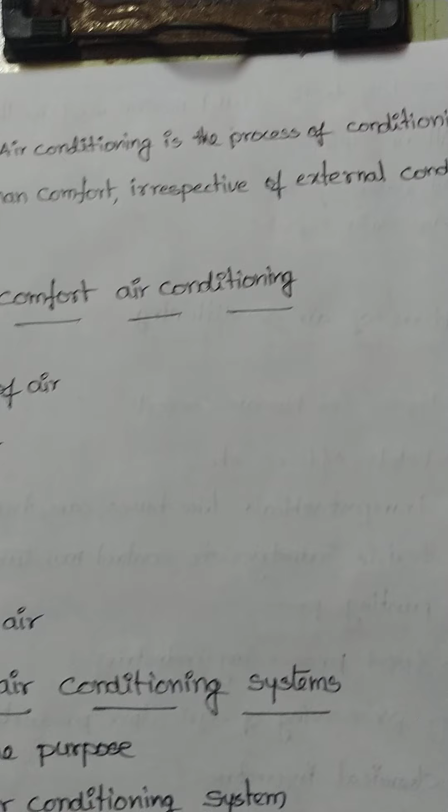Air conditioning is the process of conditioning the air according to human comfort, irrespective of external conditions.

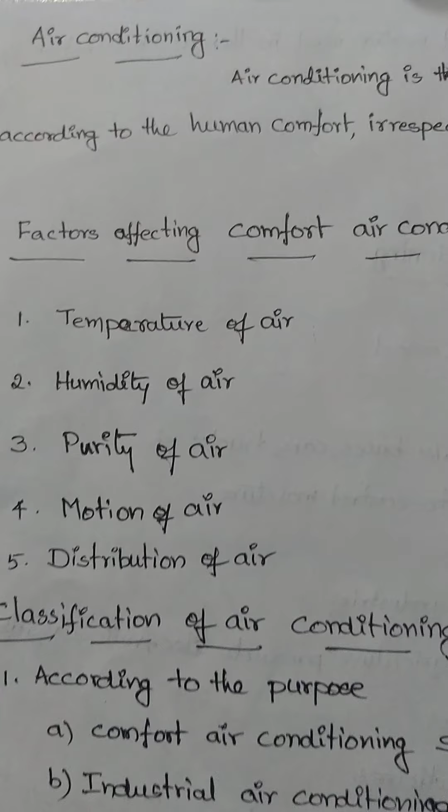So air conditioning means not only cooling or heating, it can maintain the temperature of air, humidity of air, purity of air, motion of air, and finally distribution of air.

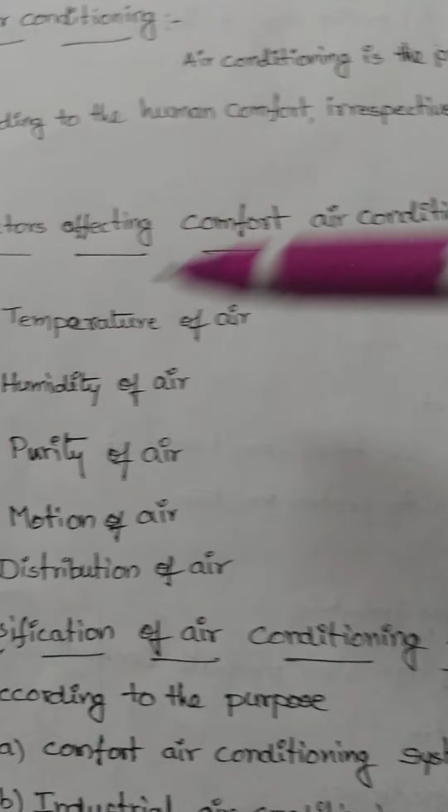These are the factors affecting comfort air conditioning. First one, temperature of air.

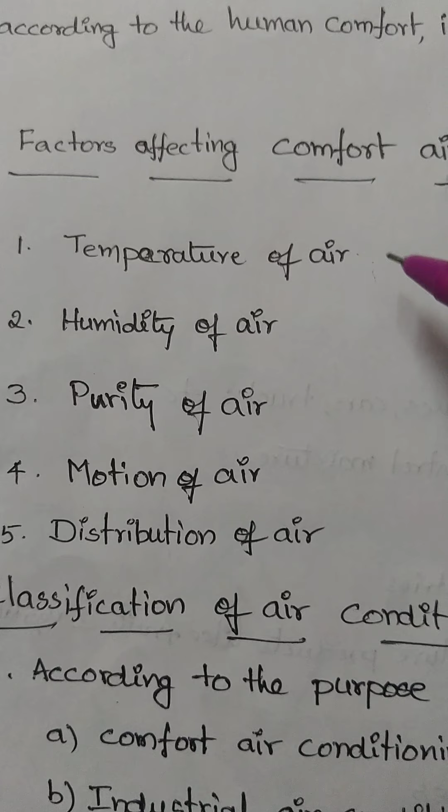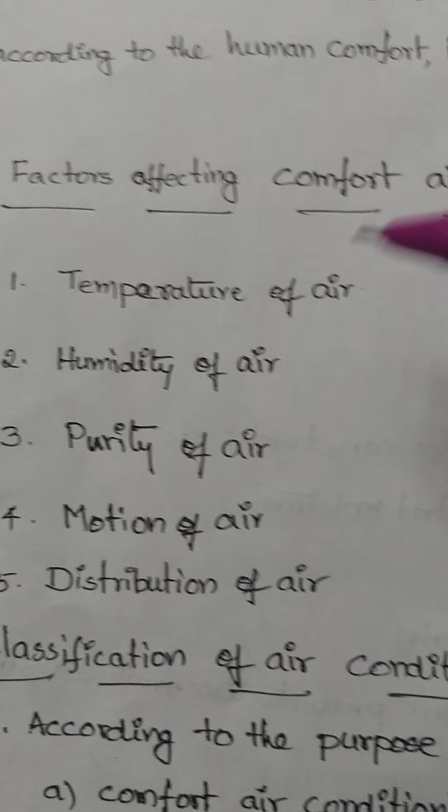Normally, human comfort temperature is around 24 degrees centigrade. But in summers, it should be around 40 degrees, or in winters, it is around 15, 10 degrees like that. So in summer air conditioning, the system cools the air, and in winters, the system heats the air according to human comfort. Next, humidity of air.

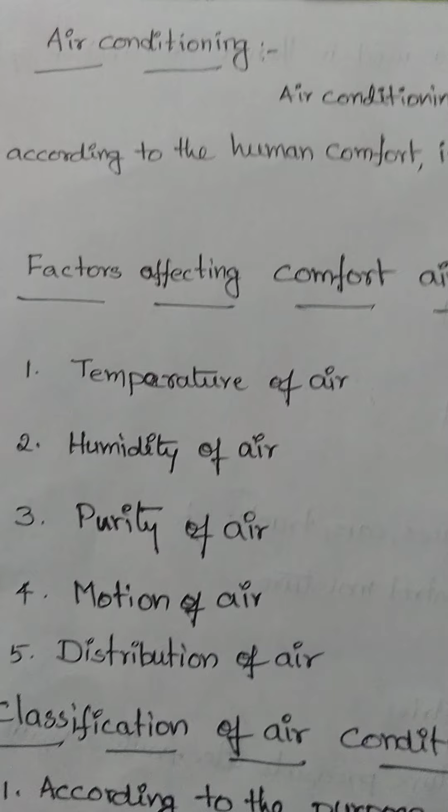Humidity also plays a major role for human comfort. Generally in summers, air has more humidity; in winters, it has less humidity. So human comfort relative humidity is around 50%, and it should be maintained around 50%.

So generally in summer, the system should maintain relative humidity less than 60%, and in winters, relative humidity of air is more than 40%. The system should maintain the humidity of air.

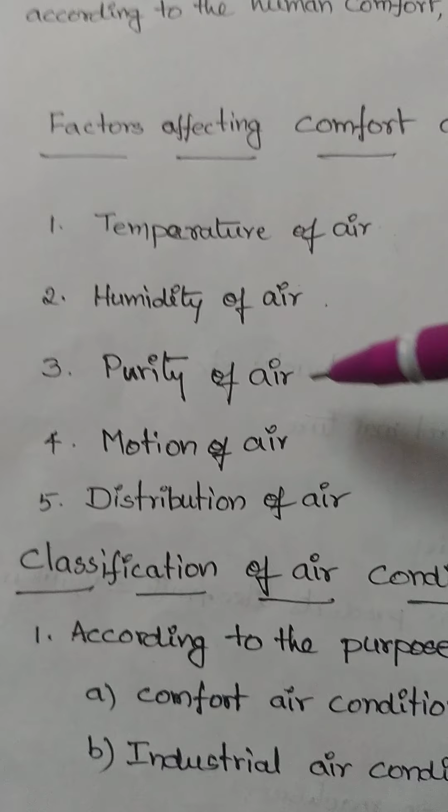Next, purity of air. Purity of air is also an important factor for human comfort. For that purpose, filters are provided in the air conditioning system. Filters purify the air, removing dirt or any impurities, and that purified air is passed to the conditioned space. Next, motion of air.

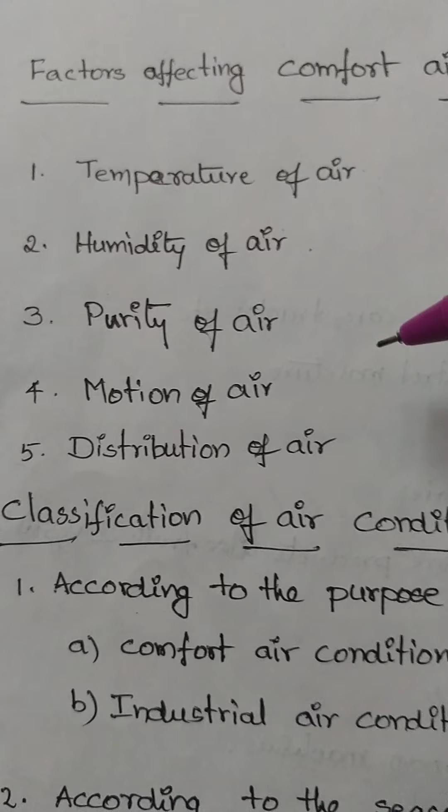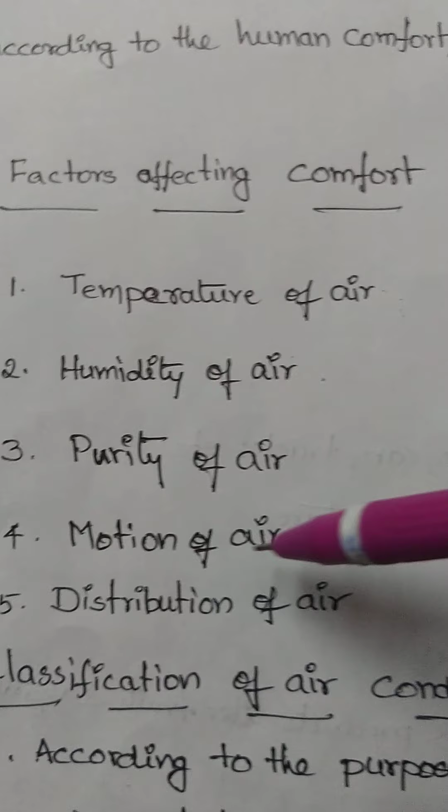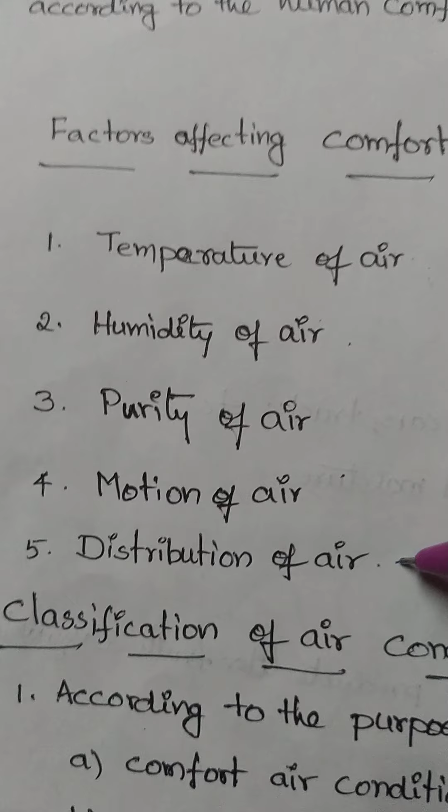Next, distribution of air. The system distributes the air throughout the room, to all corners of the room. So distribution of air is also one of the factors. These are the factors affecting comfort air conditioning: temperature of air, humidity of air, purity of air, motion of air, and finally distribution of air.

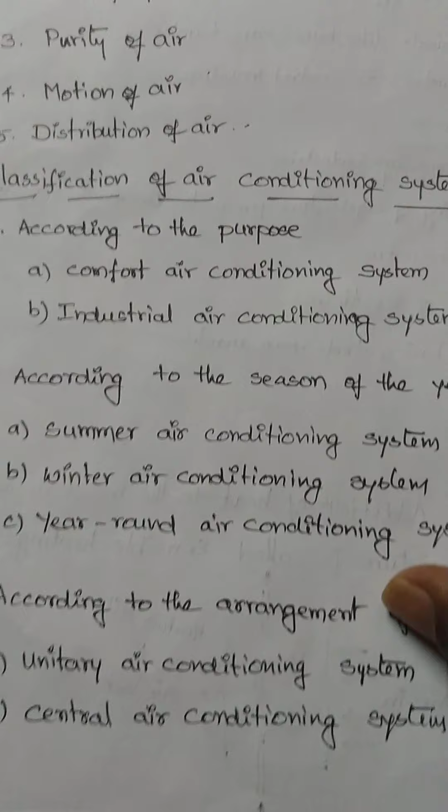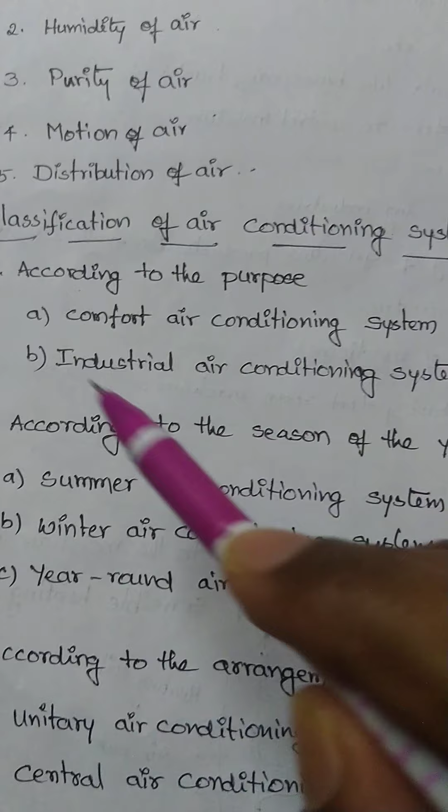Next, classification of air conditioning systems. First, according to the purpose, air conditioning systems are classified into two types: comfort air conditioning system and industrial air conditioning system.

Comfort air conditioning system is for human comfort, and industrial air conditioning systems are for industries that require air conditioning, for example food processing industries, storage of medicines, and dairies. So under purpose: comfort air conditioning system and industrial air conditioning system.

Next, according to the season of the year: summer air conditioning system, winter air conditioning system, and year round air conditioning system.

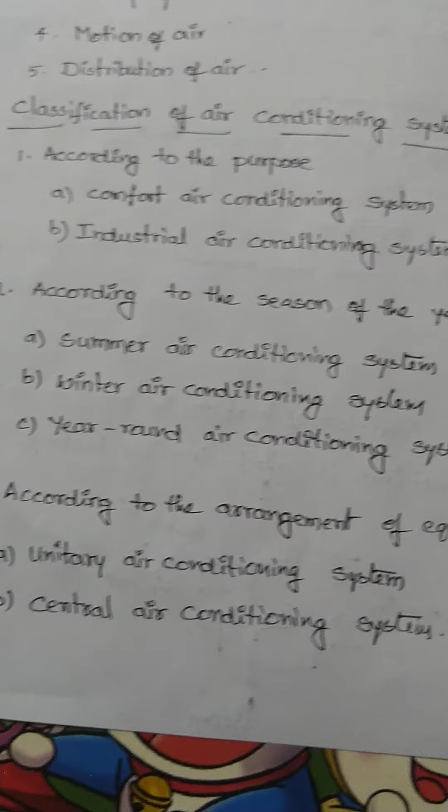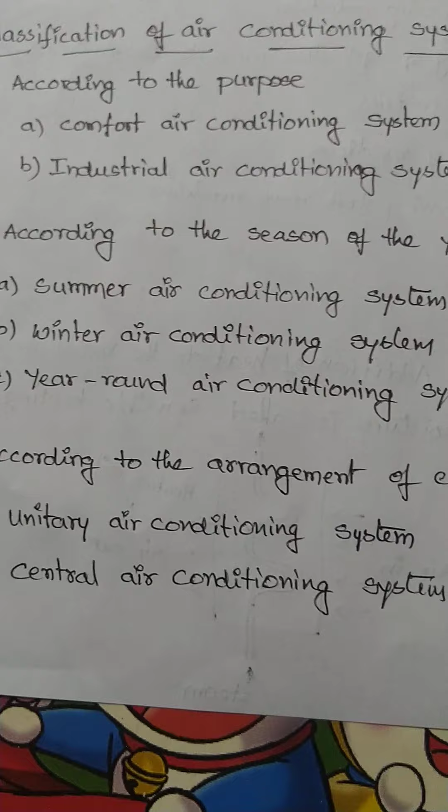Next, according to the arrangement of equipment. First is unitary air conditioning system, for example window air conditioning or split air conditioning. Second is central air conditioning system, generally used in theaters, malls, and some industries.

Finally, according to the fluid media used in the thermal distribution system: all air system, all water system, air water system. These are the classifications of air conditioning systems.

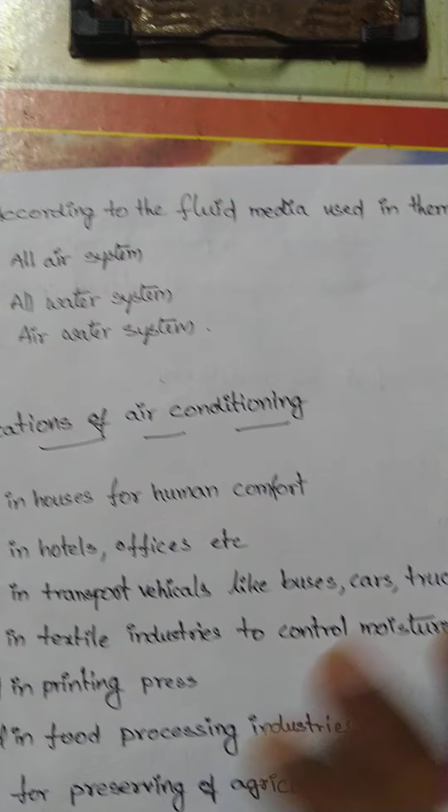According to the purpose: comfort air conditioning system, industrial air conditioning system. According to the season of the year: summer, winter, and year round air conditioning system. According to the arrangement of equipment: unitary and central air conditioning system. According to the fluid media used in thermal distribution system: all air system, all water system, air water system. That is the classification of air conditioning.

Next, applications of air conditioning. Air conditioning is used in houses for human comfort, in hotels and offices for commercial purposes, in transport vehicles like buses, cars and trucks, and in textile industries to control moisture.

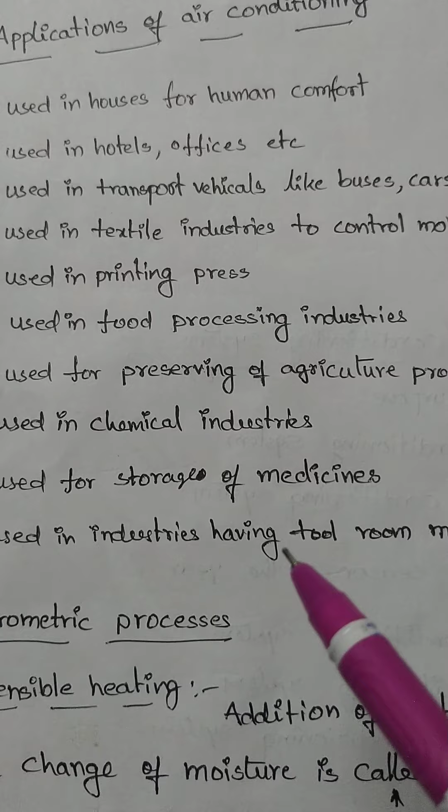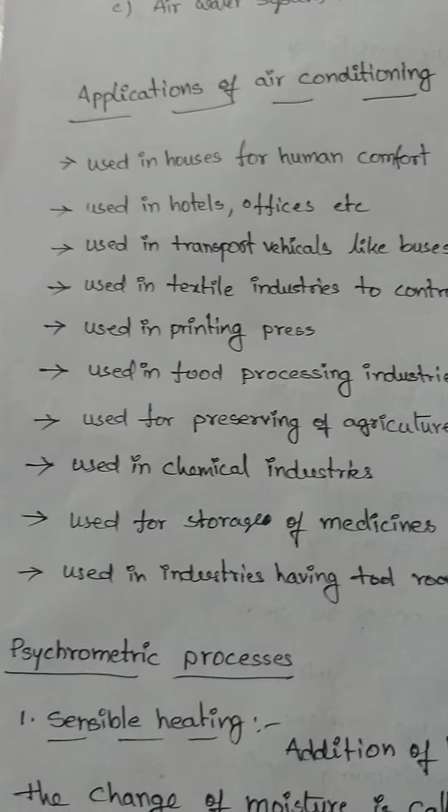Used in textile industries to control moisture, used in printing press, used in food processing industries, used for preserving agriculture products like fruits and vegetables, used in chemical industries, used for storage of medicines, and used in industries having tool room machines. These are the applications of air conditioning system.

Next, psychrometric process. Under psychrometric process, generally: sensible heating, sensible cooling, humidification and dehumidification. These are the processes under psychrometrics.

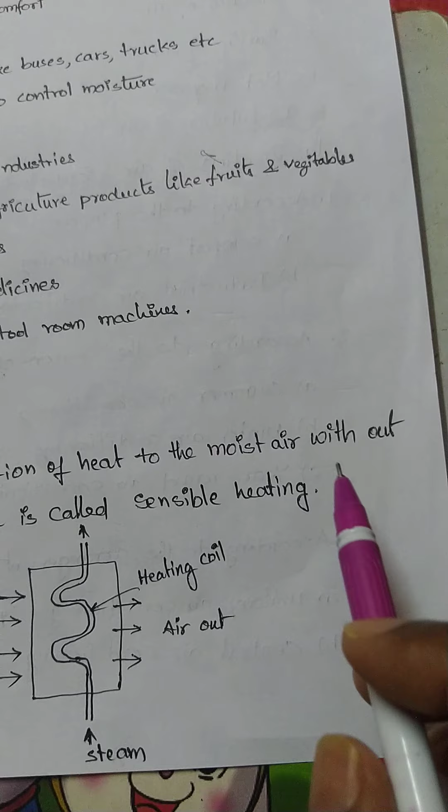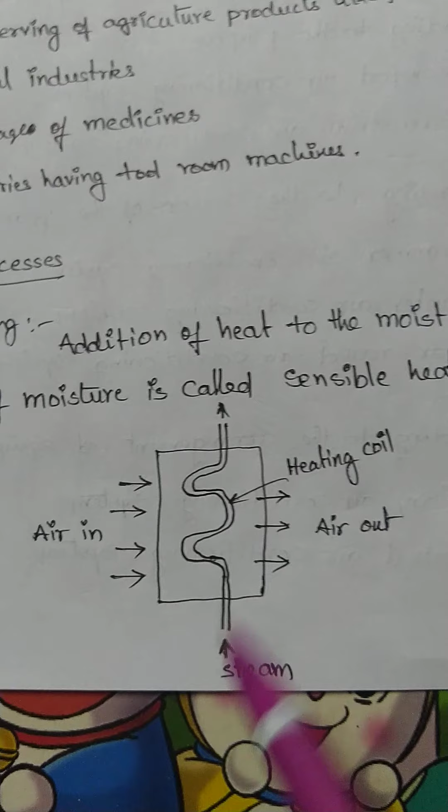First, sensible heating. What is sensible heating? Addition of heat to the moist air without change of moisture is called sensible heating. So only heating is carried out here, with no change in the humidity or moisture content in the air.

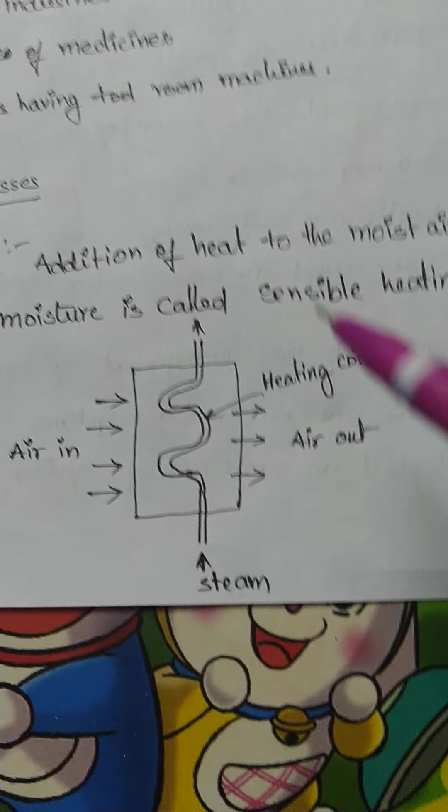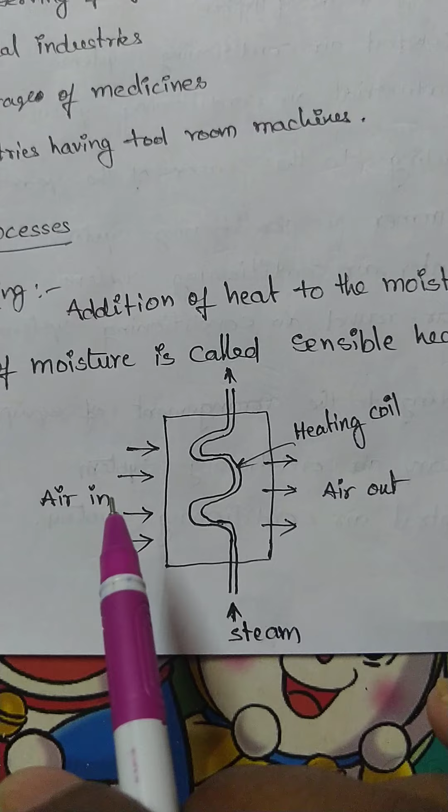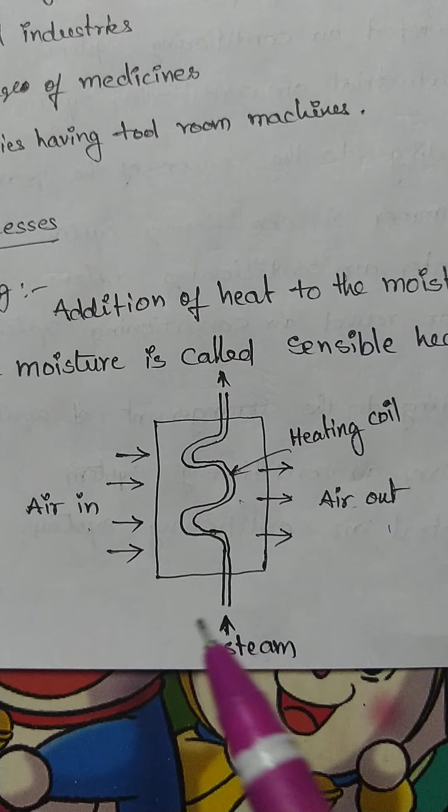This is a heating coil. Steam is passed through the coil. Now the air passes through this coil, so it gets some heat from it. Here heat transfer takes place, so that air is heated. At the leaving of this system, air is heated. So heating takes place without changing the moisture content in the air — that is sensible heating.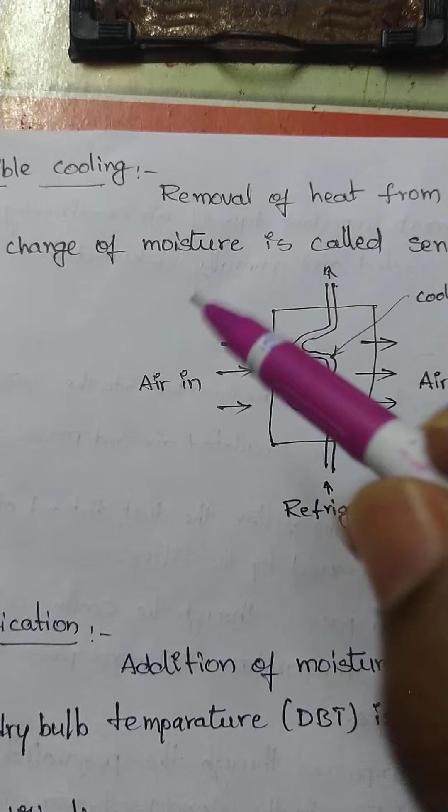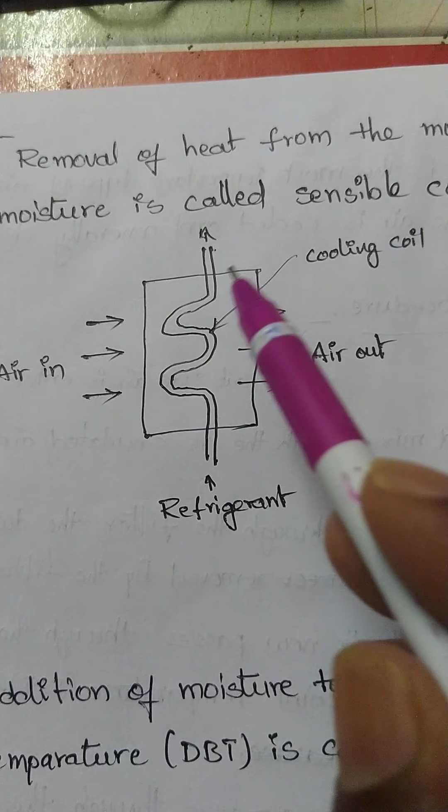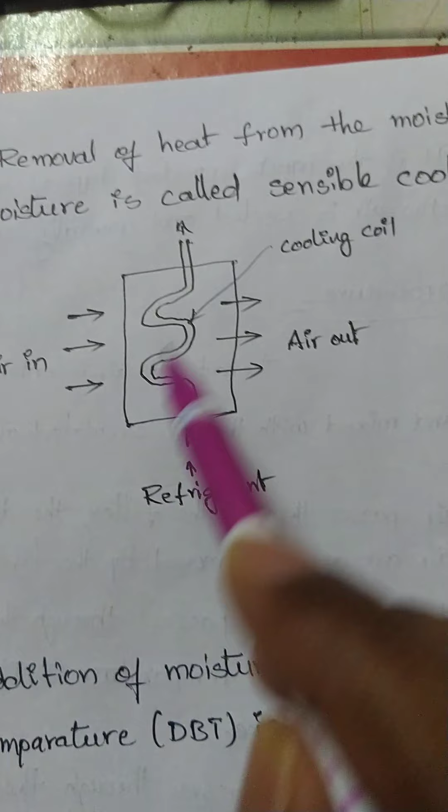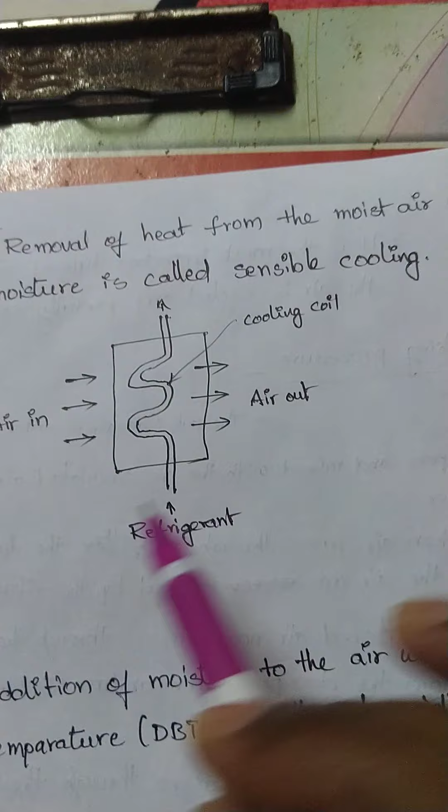Next process is sensible cooling. Sensible cooling means removal of heat from the moist air without change of moisture content. So in this system there is a cooling coil, and air passes through it from this side to that side. Heat transfer takes place, so air is cooled, but moisture remains constant. That means we cool the air without changing the moisture content. This is sensible cooling.

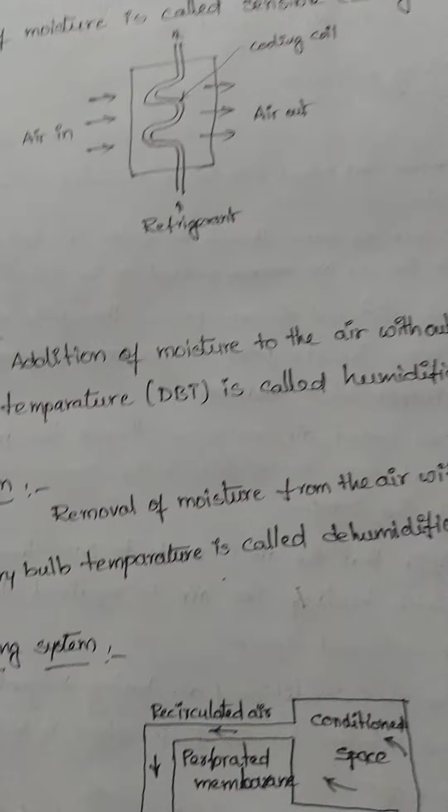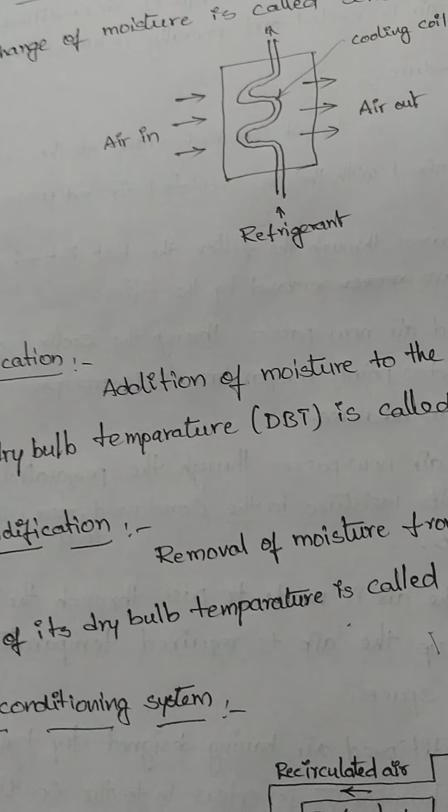Next, humidification. What is humidification? Addition of moisture to the air without change of its dry bulb temperature is called humidification. So moisture is added to the air but dry bulb temperature is constant.

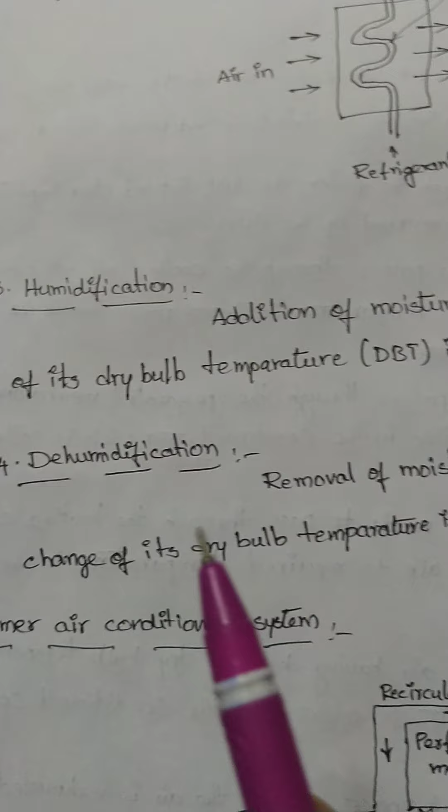Next, dehumidification. Dehumidification means removal of moisture from the air without change of its dry bulb temperature. That means moisture is removed from the air but dry bulb temperature is constant. So these are some of the processes in psychrometric process.

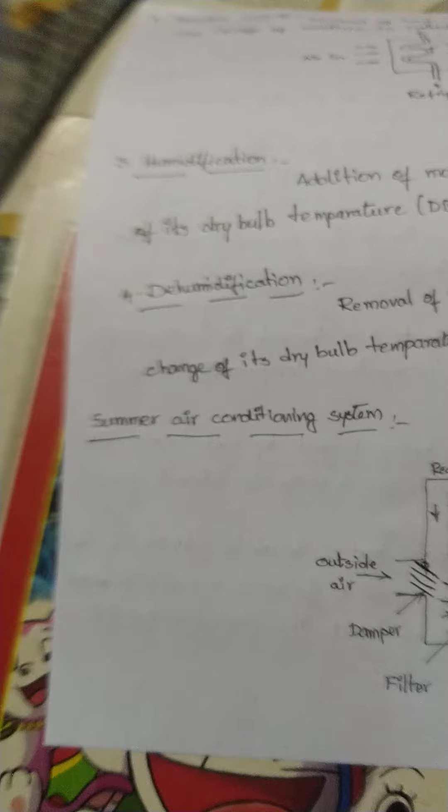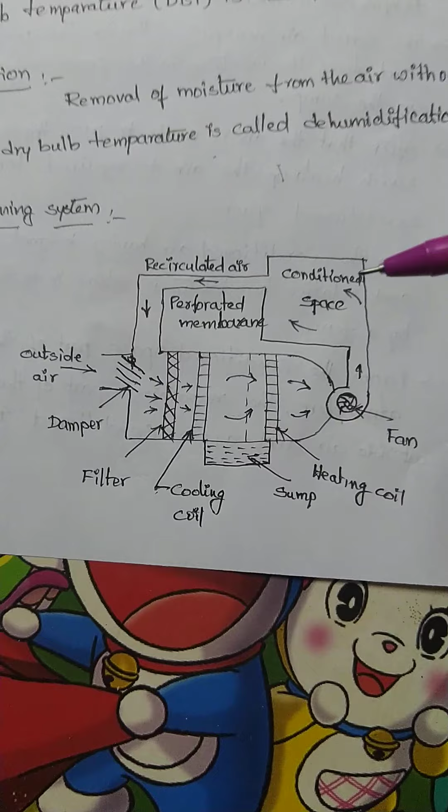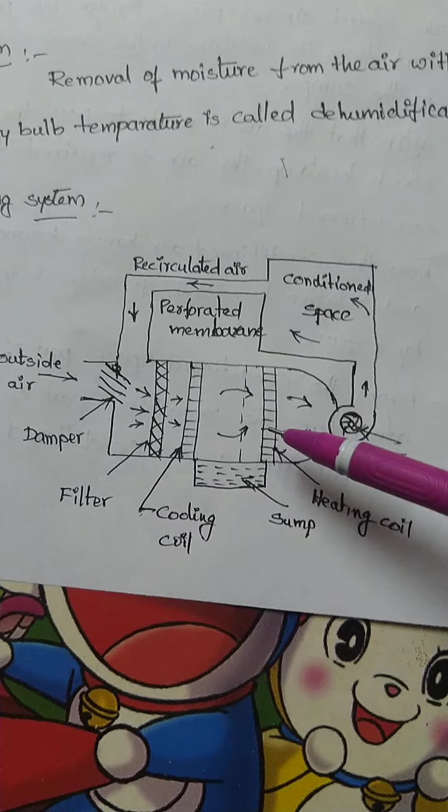Next, the summer air conditioning system. There is a small block diagram. Here, these are the dampers, which means passages, simply openings. Next, this is a filter, this is the cooling coil, and this is the perforated membrane, made of porous material. Then this is the heating coil and fan. Here this is the conditioned space, where we want to cool the space.

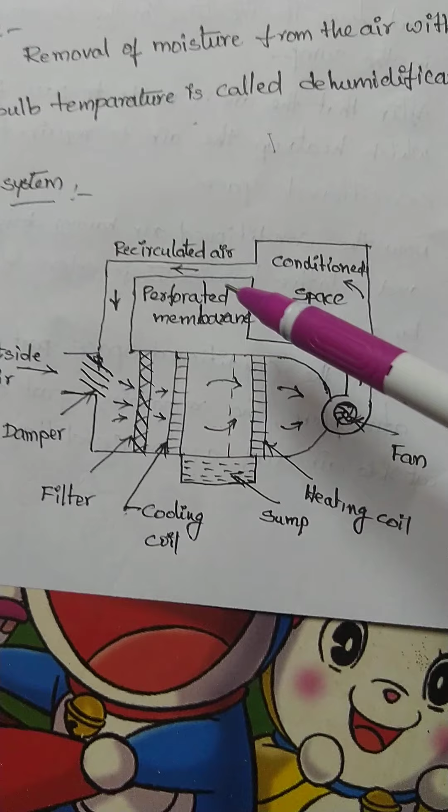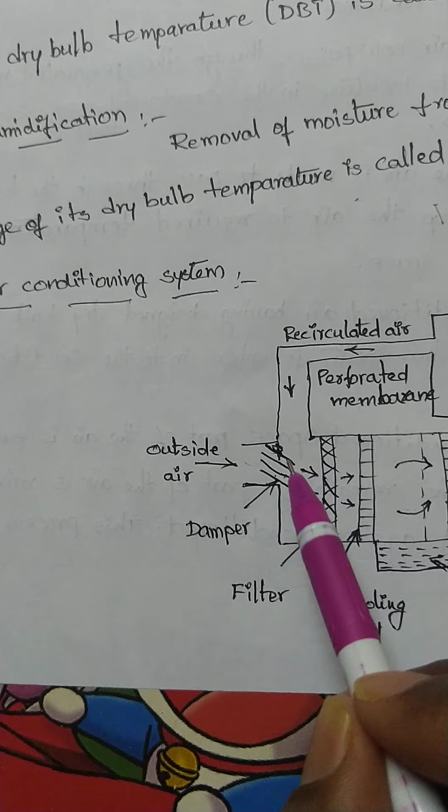This passage is for the recirculated air. So in the summer air conditioning system, outside air passes through the dampers, which are simply openings, into the system, and it mixes with recirculated air from the conditioned space.

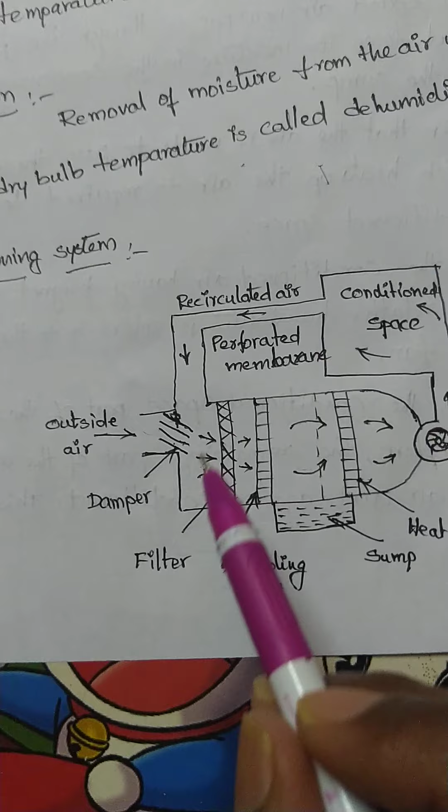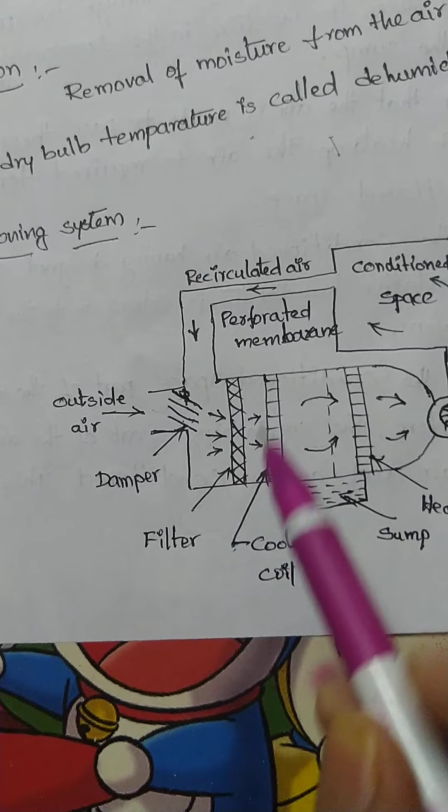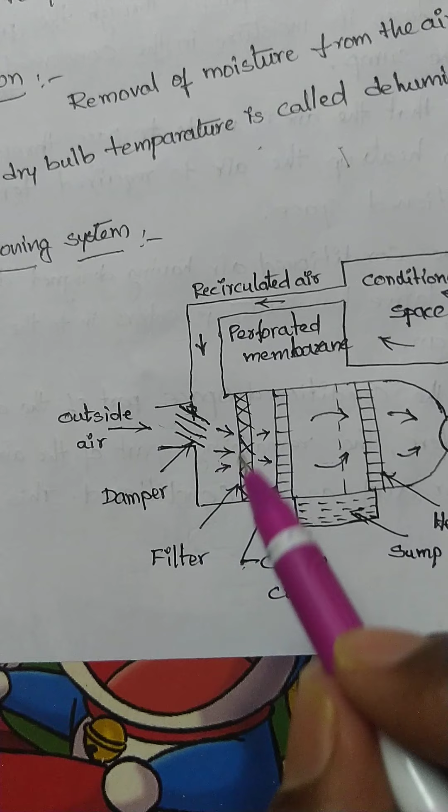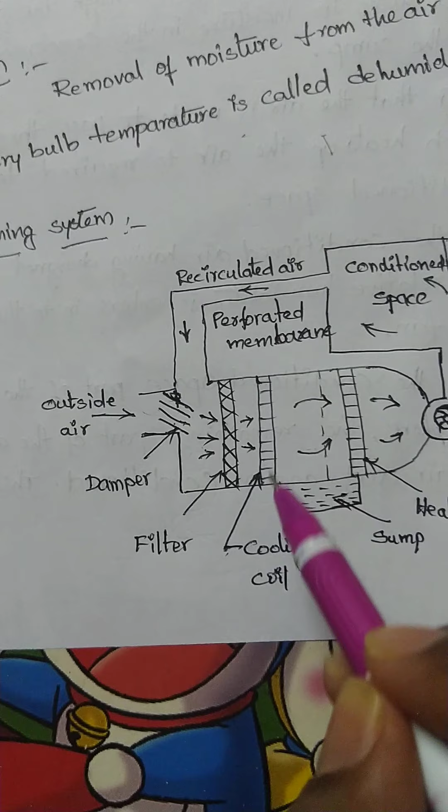Then the air passes through the filter. The purpose of the filter is to remove dirt, dust, and other impurities present in the outside air, so it purifies the air. Then the purified air passes through the cooling coil.

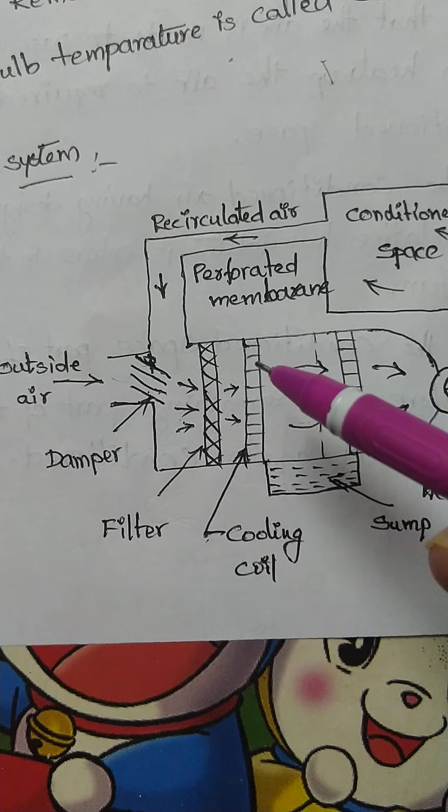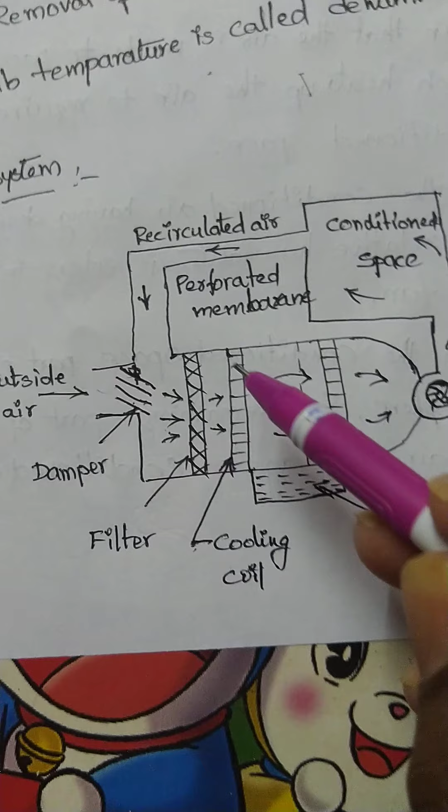Here the air is cooled almost below the dew point temperature. Dew point temperature is the temperature at which the moisture in the air starts to condense. So the filtered air passes through the cooling coil, which cools the air below the dew point temperature, meaning the air is going to condense.

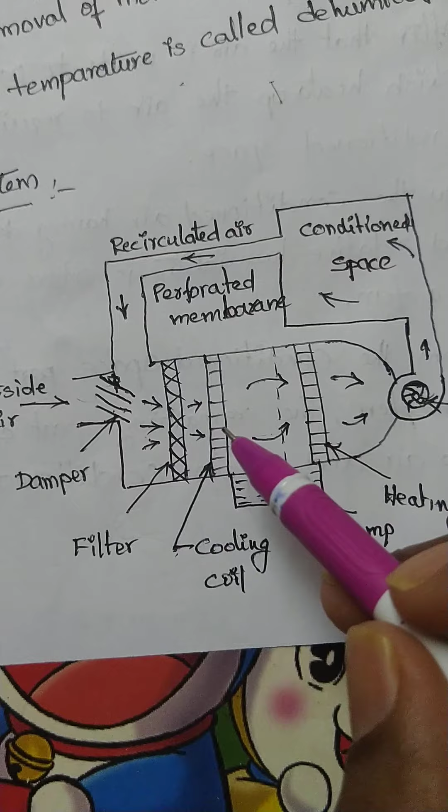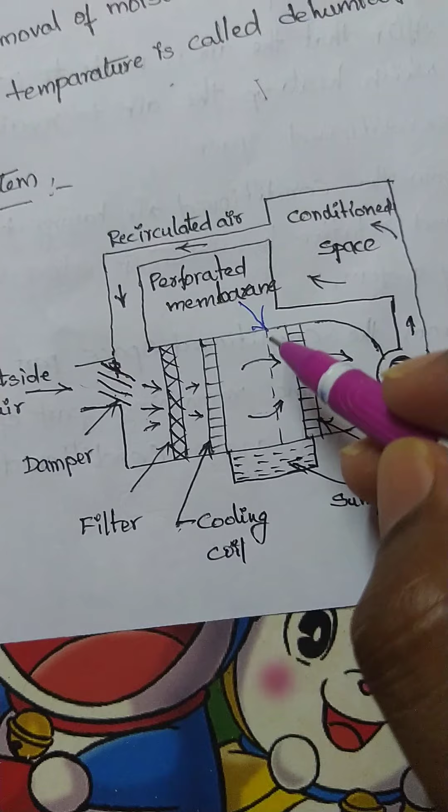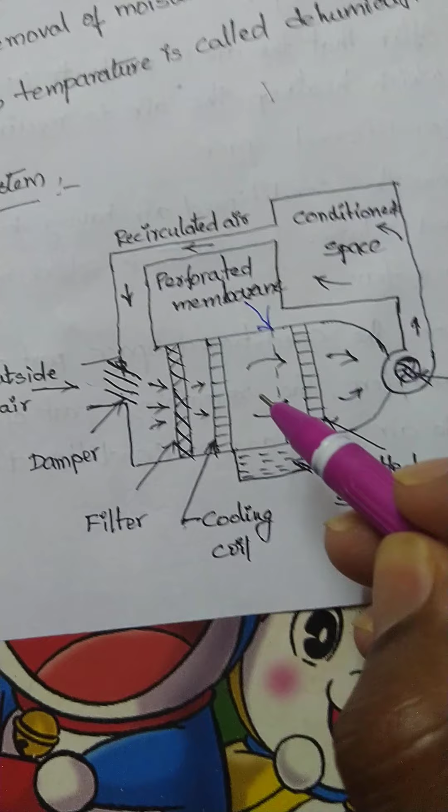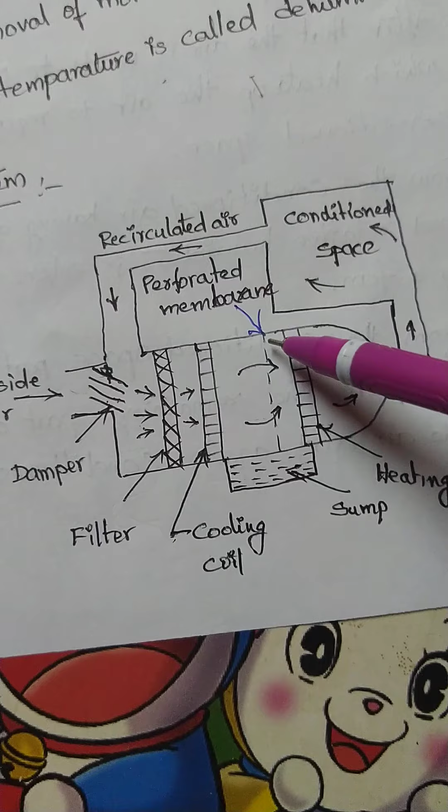Now the cooled air passes through the perforated membrane, which is like a porous material. The cooled, saturated air passes through this perforated membrane and loses its moisture, and that moisture is collected in the sump.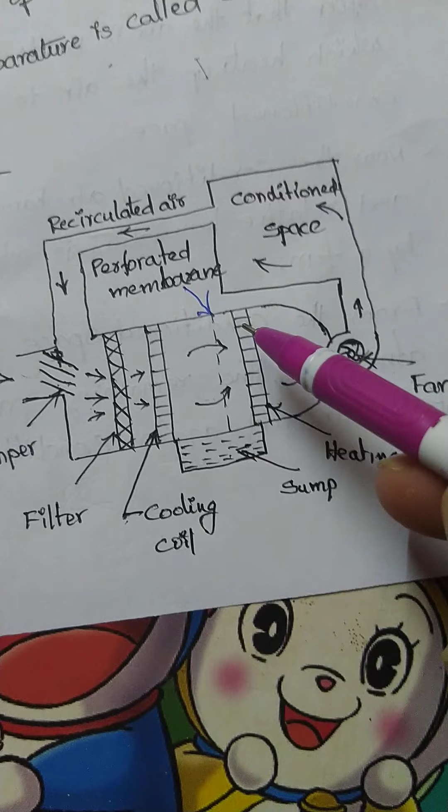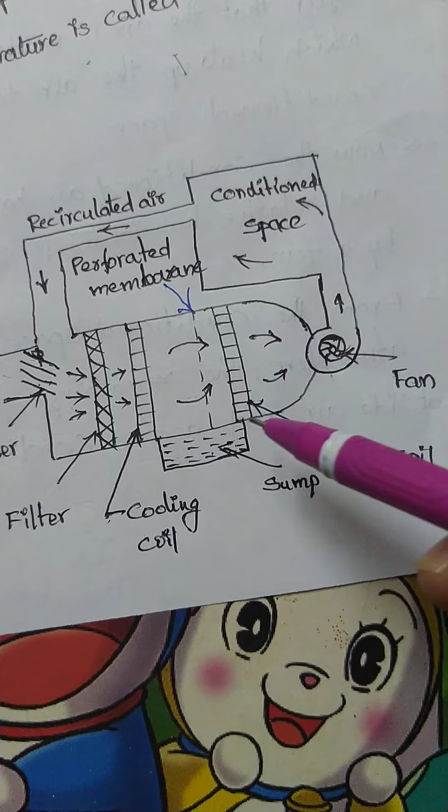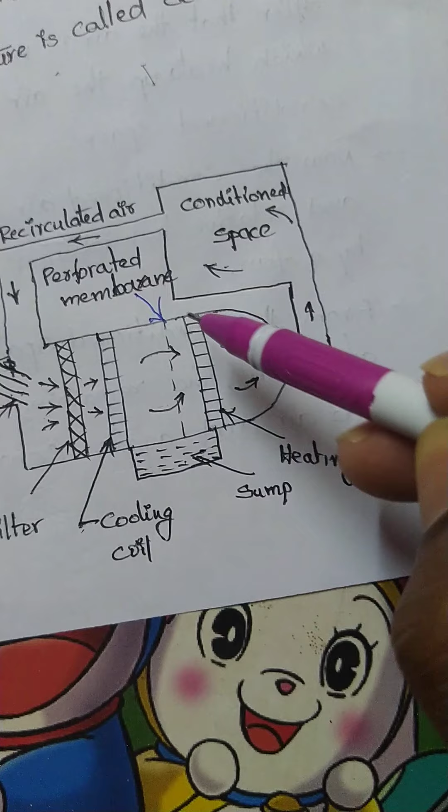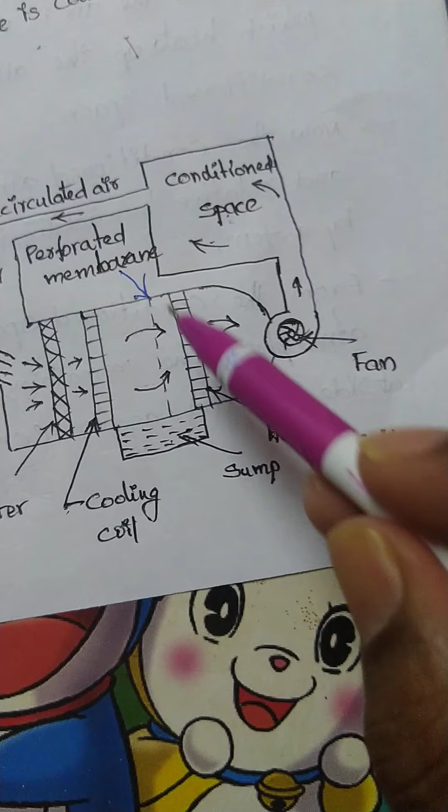Then the air passes through the heating coil. The cold air passes through the heating coil, where it is heated to the required conditioned space temperature. This is the cooling and dehumidification process, meaning removal of moisture from the air.

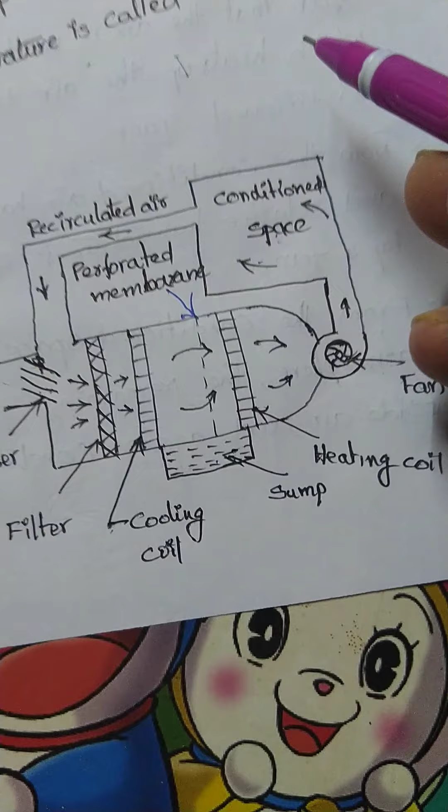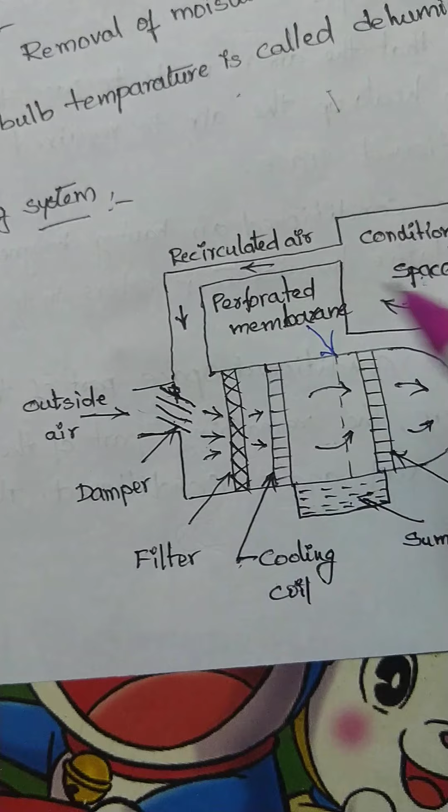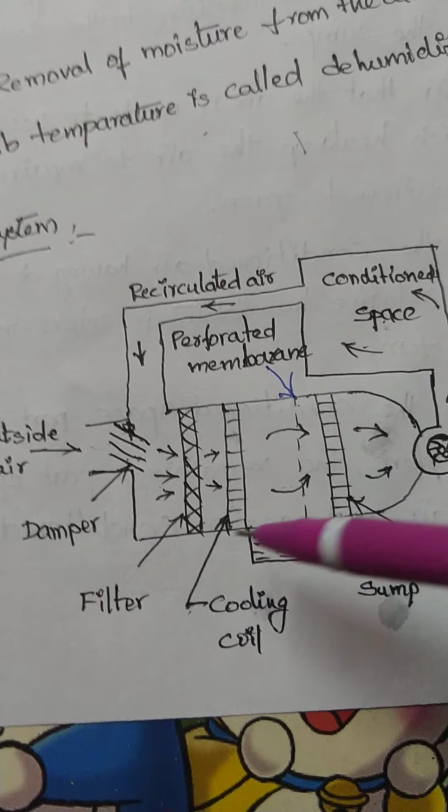This conditioned air now passes into the conditioned space through the fan. After circulating in the conditioned space, some of the air is exhausted to the atmosphere, and some part is recirculated and mixed with outside air, and the process continues. So generally in summer, the cooling and dehumidification process is carried out. Here we should observe the dehumidification process, where moisture is removed from the air and collected in the sump.

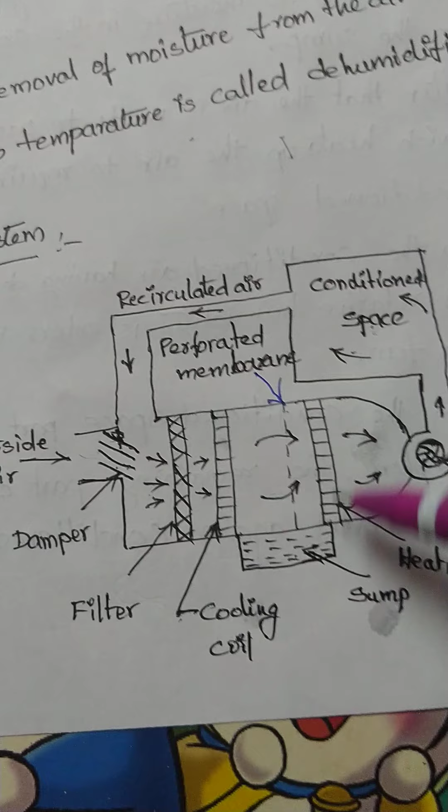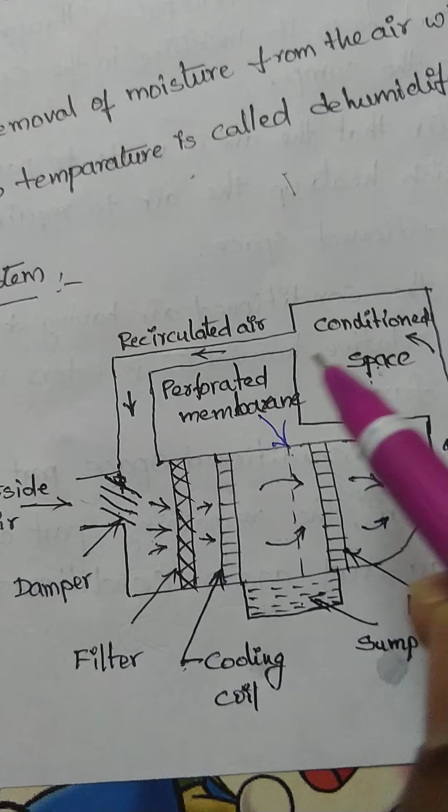So the dehumidified air now passes through the heating coil, which heats the air according to the required temperature in the conditioned space. Then the conditioned air passes into the conditioned space through the fan. Some of the air is exhausted and some is again recirculated. This is the summer air conditioning system.

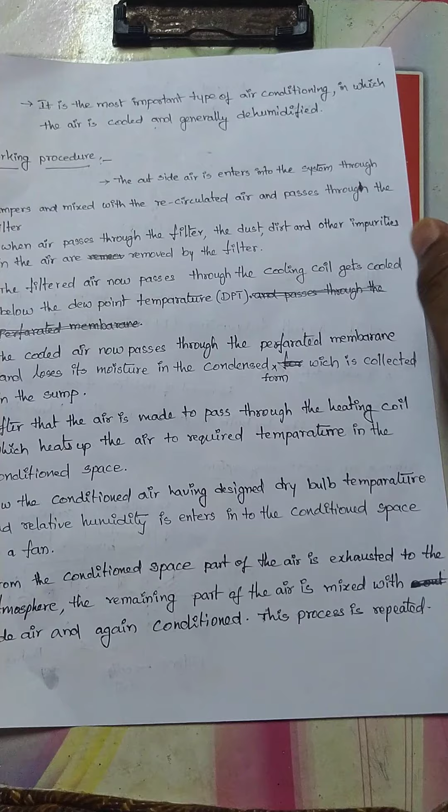So this is the procedure of the summer air conditioning system. In the summer air conditioning system, generally the cooling and dehumidification process is carried out.